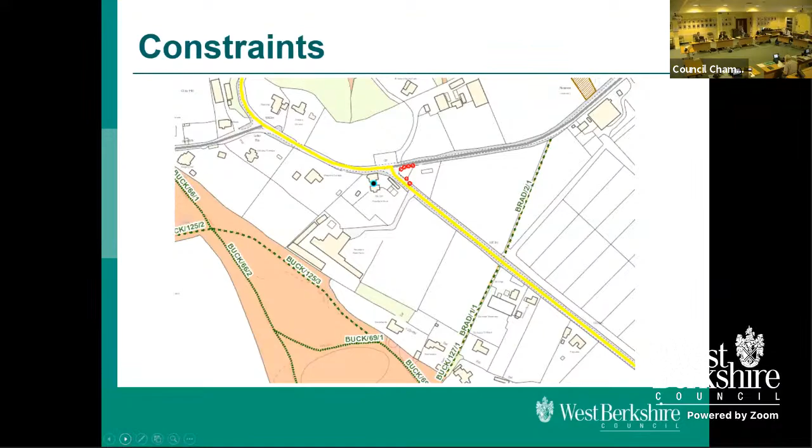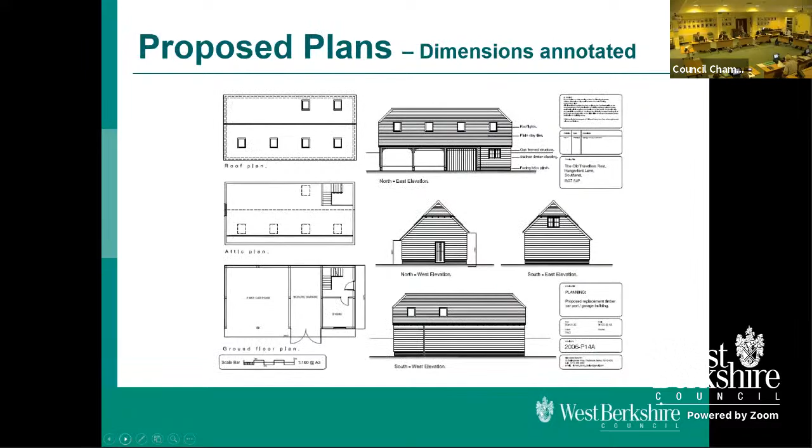So just note that the roof form in this one primarily - here's the proposed plan introducing half hips and a reconfiguration. This is putting the two alongside each other.

So just briefly going through the changes. The approved scheme has gable ends, whereas the proposed scheme has introduced half hips. There are 4 roof lights on the front on both plans. Originally there were 4 roof lights to the rear, but now there are just 2.

The window has switched to the opposite side elevation. So the window as proposed here and as built is on the side facing away from the house, whereas the doors move from the outside to the side facing the house. Internally, the carport, garage and store are all flipped round so that the carport is at the opposite end, and the upstairs storage remains the same.

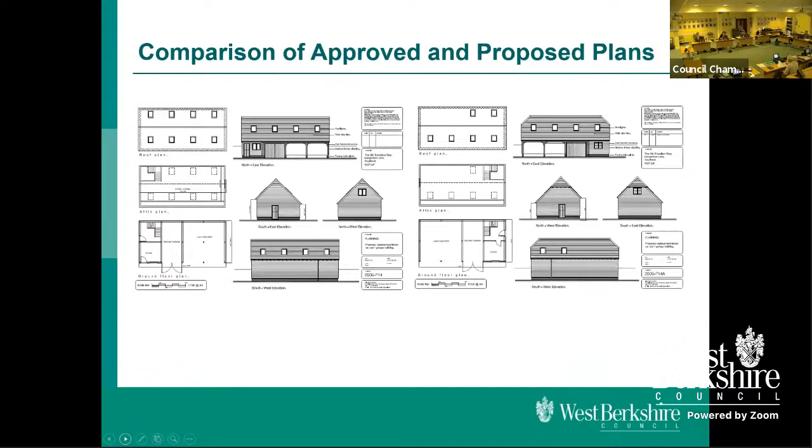I'll come on to more details. We do have a complete table of the changes requested on the site visit, which covers the dimensions. I'll turn to that in a moment, along with the design elements I've just mentioned, and the materials, which I'll come to. But first, I'll show some pictures.

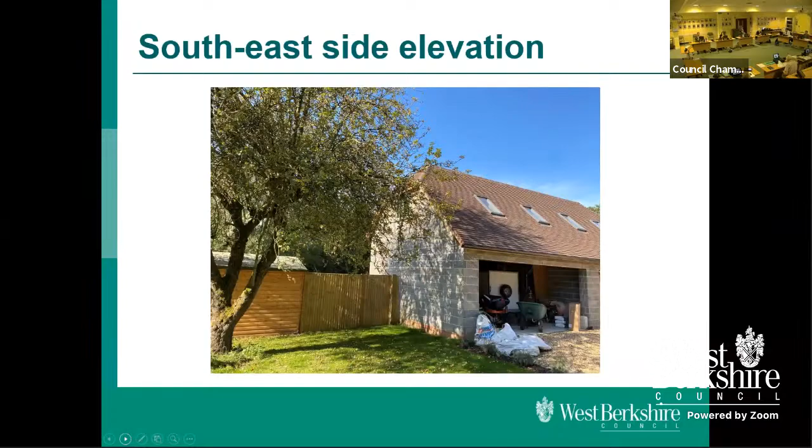The front elevation. The rear. That's the side facing away from the house - the window is obscured by the tree there, but it's just under the eaves. That's the view looking southeast away from the house.

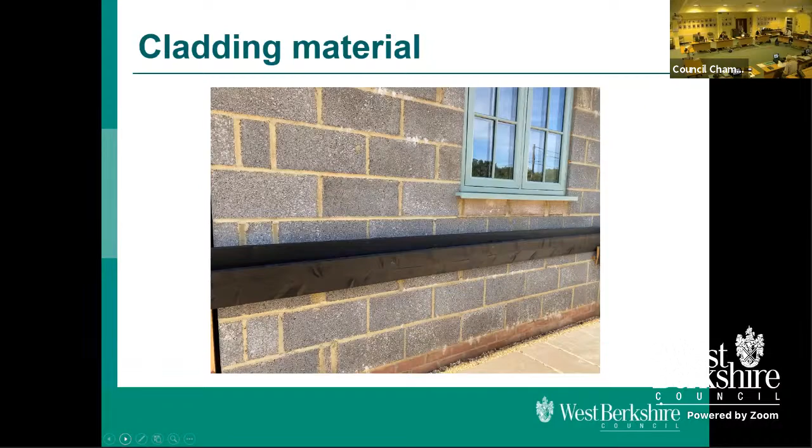Some of the main causes for concern have been regarding the scale of the development and some discrepancies in the type of construction and the dimensions between what was approved, what was constructed, and what it appears has been applied for in this application.

In terms of construction and materials, there's a schedule set out in your update report on page 2 of the application, comparing what was stated on the approved documents and what is proposed now. The outbuilding was originally described as a timber carport, but it's clearly been constructed of block work. As I said, work's temporarily ceased pending this application, but it's not its final form. It is proposed to clad it so that it would have the outward appearance of a timber clad structure, with timber posts going down the centre of the carport to complete the look.

Yes, and I've included an email from the agent just clarifying that position in the update report for you.

With respect to this change, it's our view as planning officers that, unlike a listed building where the nature of construction is quite important, the internal construction is not material in this instance. Internal alterations do not normally require planning permission, and what we're primarily concerned about is the external appearance. So the focus has been on what the finished article will look like rather than the type of construction, whether it's block work or timber.

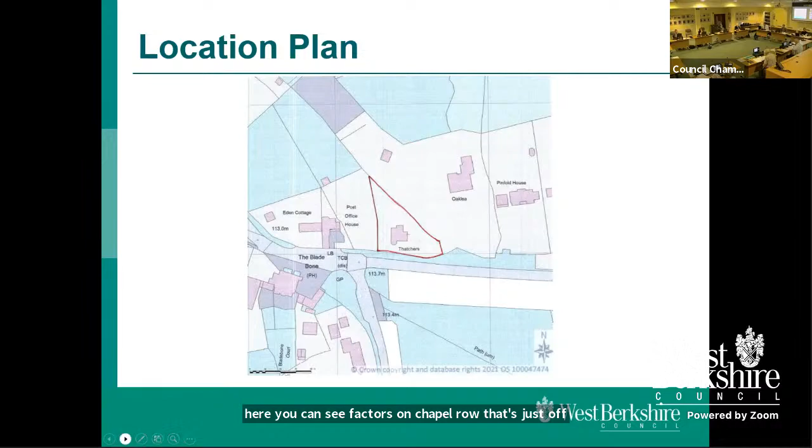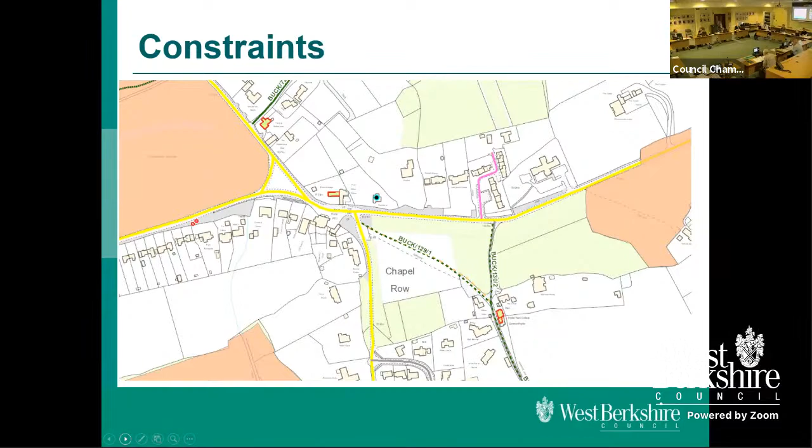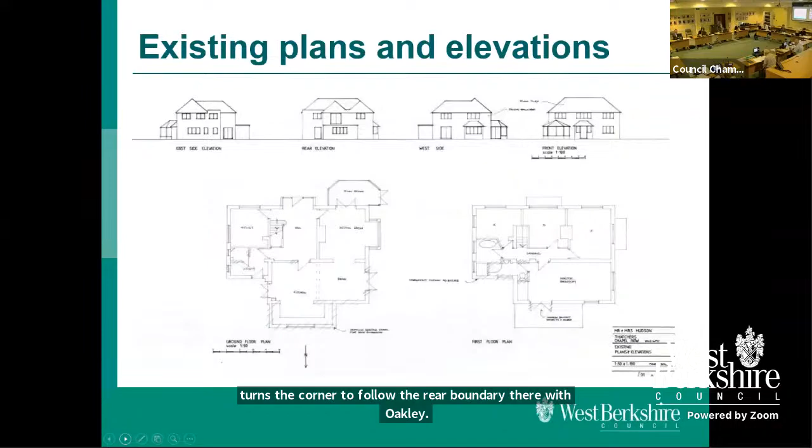That's the existing plans. This is the proposed ground floor plan. It's worth just noting here you have the front building line, so you can gauge how the attached outbuilding comes forward and to what extent.

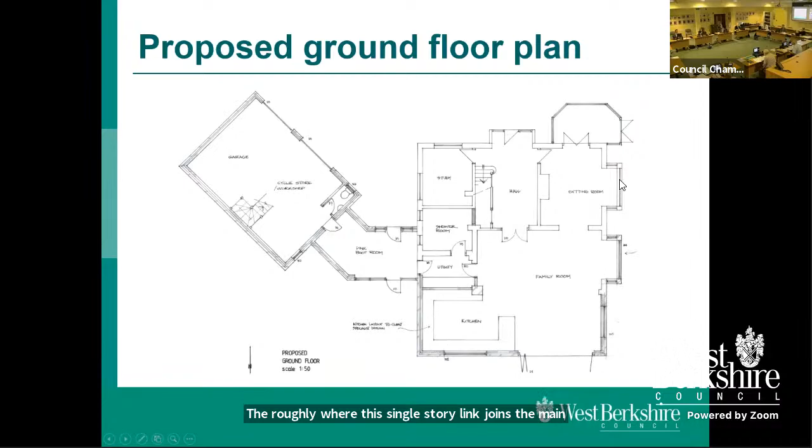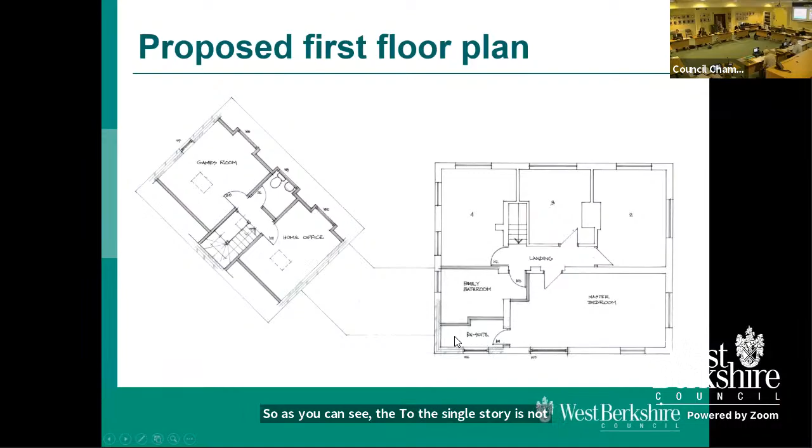Roughly where this single-storey link joins the main house is where it's a 2-storey extension, and then you have the single-storey to the rear and the bay window to match that one there. As you can see, the single storey is not visible here coming out. So it's just a relatively smaller 2-storey extension there, and then the upper storey of the attached outbuilding.

So that's the proposed front elevation, and where the line is in the middle here is where it curves round, so that this corner here on the far right comes forward of the front building line.

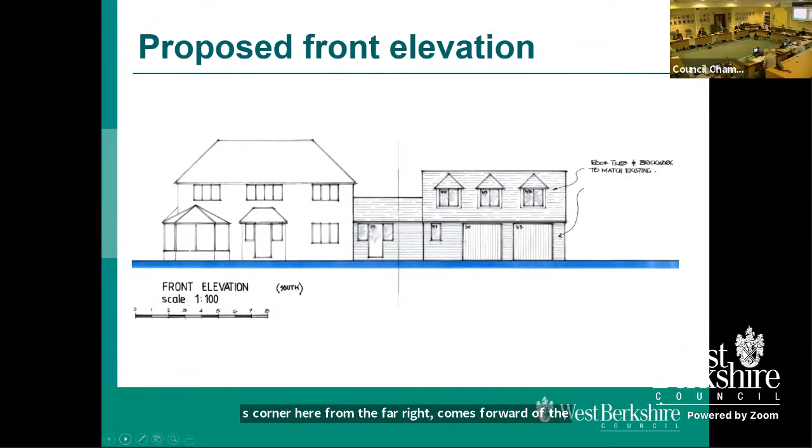And that's the rear elevation. Again, the line this time signals it's going the other way. So you can see the single-storey rear extension, the bay window on the right-hand side, the extra hip for the 2-storey extension.

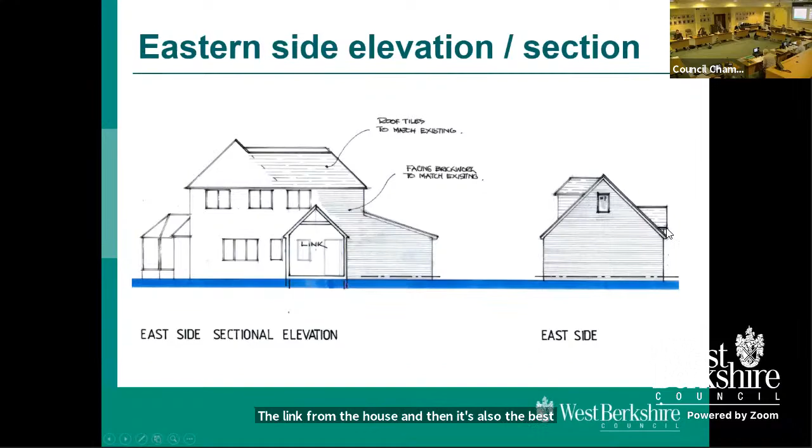That's the eastern side, with the attached outbuilding. You can see the 2-storey infill extension, the side of the single-storey rear extension, and the link from the house. The eastern elevation is also the side of the attached outbuilding with the dormer windows and headroom - of course, there are no windows in that bit.

And that's the other side elevation, the western side, where it's replicating the bay window, and you've got the side of the single-storey rear extension.

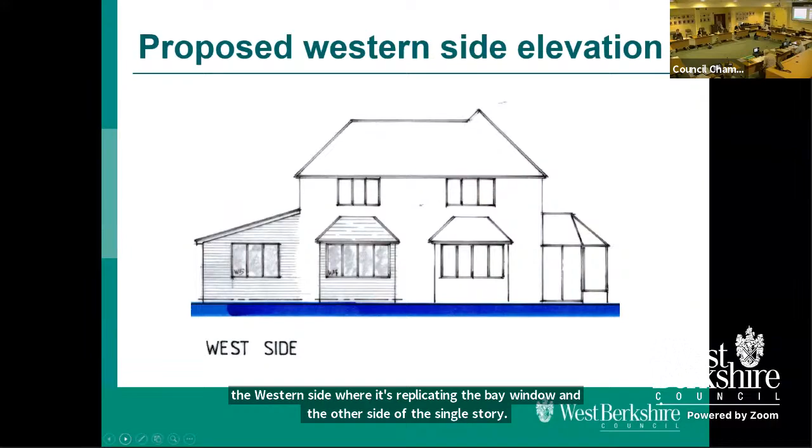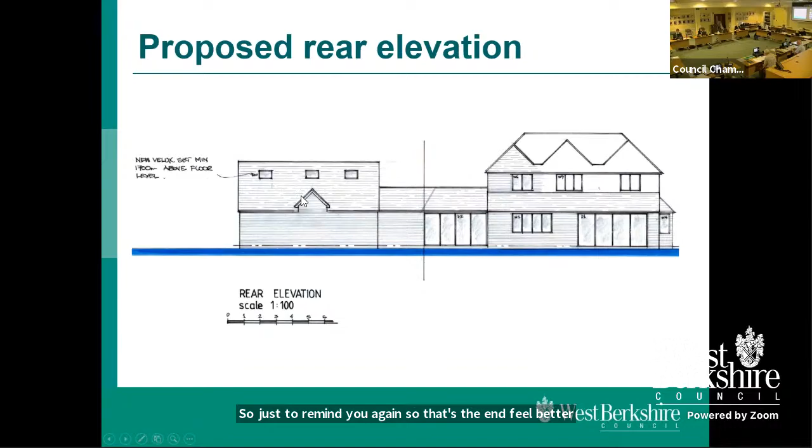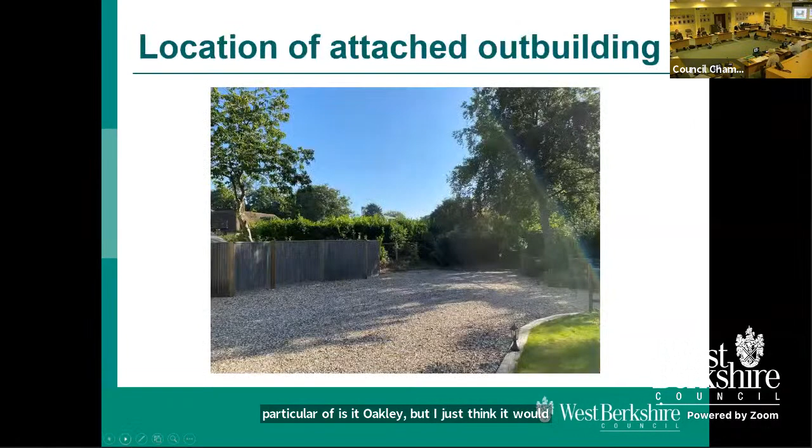The front street scene we've just been talking about - and I hope you're not going to think I'm a real pain - can we see the photo where it was very clearly demonstrated what it looks like at the moment? If I recall, I think you can see the rooftops of, is it Oakley? I just think it would be good if we could see it, unfortunately it's disappeared off my screen. Is when you share the screen, everything goes - there we go. And was there another one as well? Oh, there's 3 photos. Shall I just go through them one by one?

Yes please. So that's almost directly opposite, looking at Thatcher's. You see the roof to the right, can't you, of Oakley? Yeah, so it's kind of in here. And we looked at the height above these here for the roof. I'll move on, so just a bit further to the west from the car parking. And then gone back the other way, sorry, so that's a bit further east along the green. So that's the eastern side of Thatcher's there, so it's in here.

Thank you. As obviously a substitute, I wasn't aware that I needed to be at the site visit. So it's interesting to see that and to think about and try to envision what a two-story building in that position might have. So that's really helpful, thank you.

Thank you, and I will explain when we discuss site visits at the end of the meeting. But of course, if you know you're a substitute, you're always welcome at a site visit.

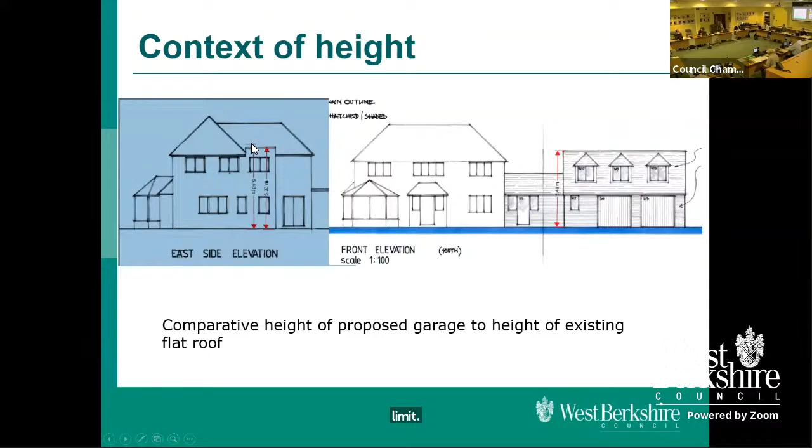Councillor Somner. Thank you, Chairman. I'm going to dissipate a little of the pain from Councillor Stewart and ask Mr Dray to go back to his photographs, please. I would like to see the one from the neighbouring property, Mr Dray. One moment - if you want to just reiterate that again, so we calculate it approximately. That's probably the clearest one.

Thank you. My first observation, and thank you for clarifying that, is that I can see windows. There was a comment earlier on, I believe, about additional light being provided, but that is windows I can see there - that is the property we are talking about on the application. Yes? Yes, thank you. The other point for clarification, if you know it please, is the hedgerow that we see there in front of us, which property that sits with for ownership. Do you have that information please?

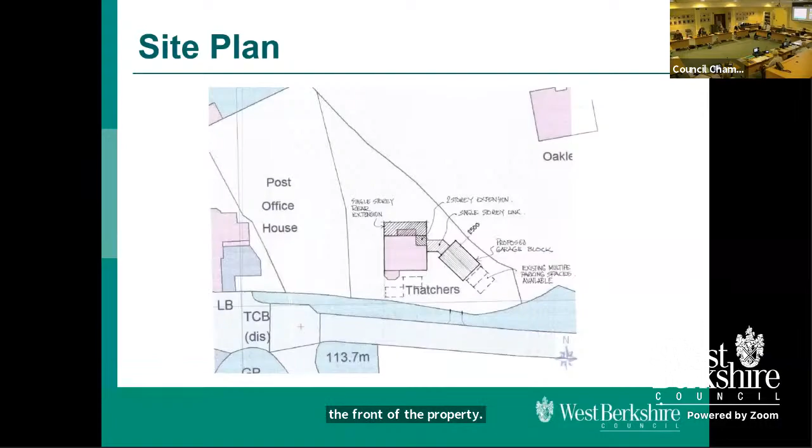That's fine, thank you. The reason for my question, Chairman, just for clarity, is an extension of the conversation about the hedgerow to the front of the property, because it depends who is responsible for managing the hedgerow between the two, and therefore who has control over the height of that hedgerow and how much of a screen it forms between the two properties. But if we don't have that for absolute certainty, then I will make my judgment without it.

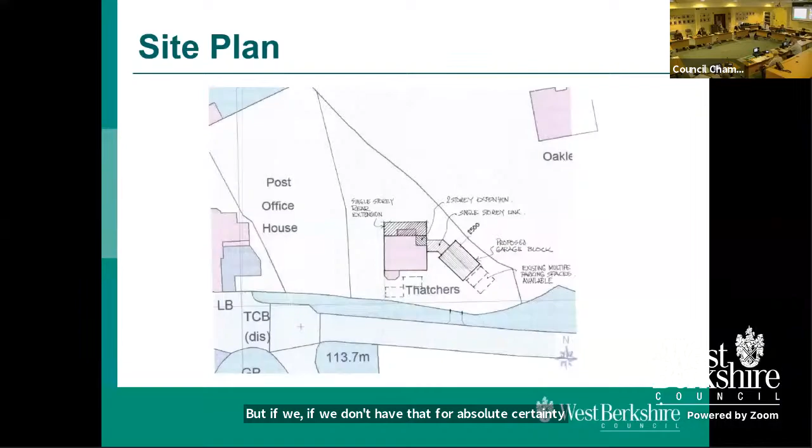Thank you. Are there any still, we're still on questions to officers. Are there any further? In that case, I now turn to debate.

Who's going to start the debate? Is that an old hand? Oh, Councillor McKinnon. Is that an old hand, Councillor Woodhams? It may well be, I think. I'll let you put it up again. Councillor McKinnon.

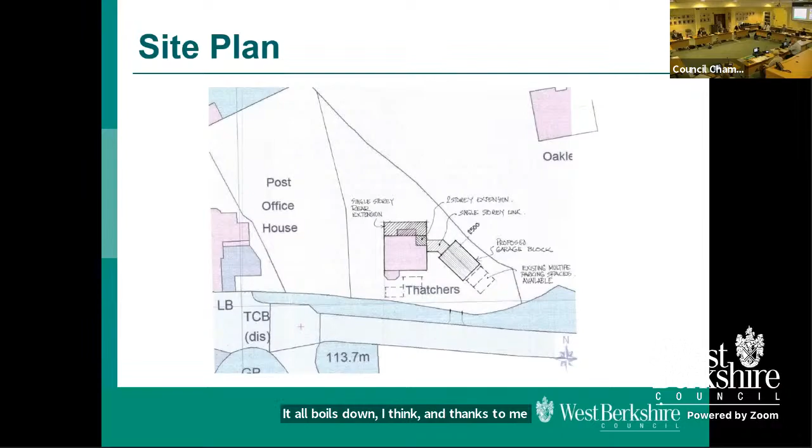Thanks, Chairman. I hope Councillor Woodhams will permit at least some debate on this. So I'll start off. It all boils down, I think, and thanks to Mr. Dray and everyone who's spoken this evening for all their very informative contributions.

For me, looking at the impact on the street scene and the wider locality, it was a different photograph, or a plan, that Bob put up earlier on. It was the view from the front elevation, and I've searched deep inside myself, but I cannot see how you could consider this not to have an adverse effect on the street scene and the wider locality. When you look at it from the front, the increased footprint's not quite the right word, but just the impact on the visual setting, I think is significant. Certainly keen to hear other contributions, but I'm minded to say this is too big for the reasons I've just described.

But that's where I am at the moment, Mr. Chairman. Right, well, thank you for that view. I'm looking for another view. I see Councillor Somner. Thank you, Chairman.

I kind of do have the other view. I'm looking at it. I mean, it is massive. There's no getting around that. It's huge.

But I think it's been accepted that the development to the rear of the property is generally accepted, not adverse in any way, shape, or form, and this is all about the development to the front. I think it is big. I think, however,